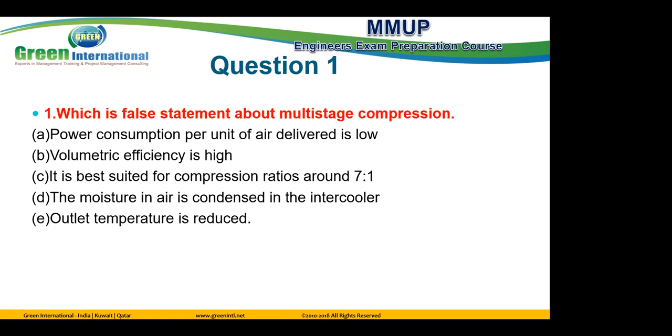All agree? B, I think efficiency will be higher in multi-stage compression. Yes, the false statement is about the stage volumetric efficiency being high.

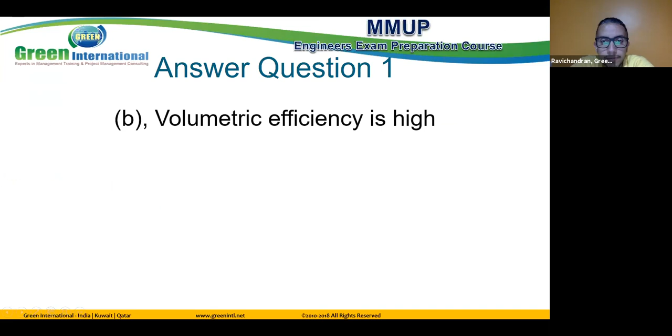In multi-stage compressor, isothermal compression is achieved by employing intercoolers. All agree? Yes. Multi-stage compressor isothermal compression is achieved by running the compressor at very slow speed.

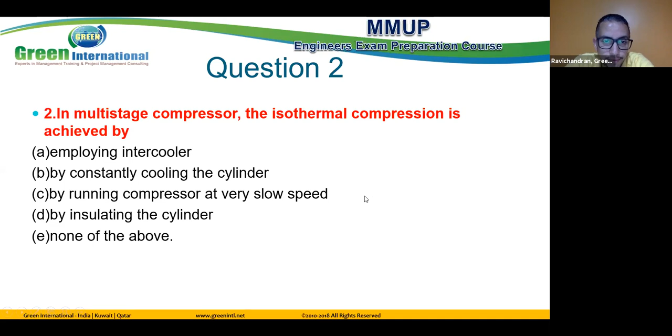Is it? Huh? Okay, why do we use multi-stage compressor?

You remember at the end of the session when I described the Brayton cycle, I told you about the constant pressure lines, that it is close together from the left side and going to be far from the right side, correct?

Remember? I think you don't remember. You remember?

What is that? This compression and this expansion by turbine. This constant pressure line with this constant pressure line. But in the left side, when going left on the TS diagram, we will see this line is close together, and when going right, we will see this line is far apart. Yes, remember this or no?

Yes, sir. According to that, this is the reason to use multi-stage compression, to not go up directly. We use multi-stage to decrease the compression work of the compressor used.

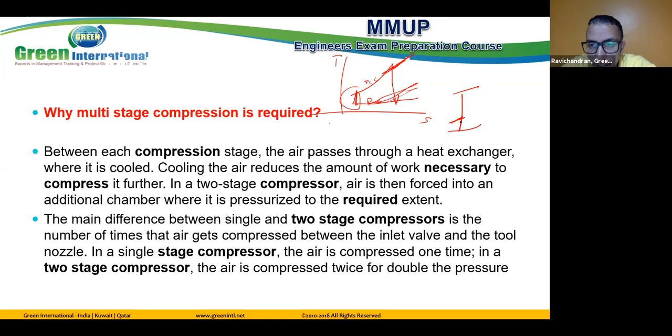So instead of going direct from this line to this line, I divide it like this. I go here, then cooling, then going again to compress, then cooling, then compress, then cooling, then compress, up to reach the final stage of the pressure required.

So instead of going direct from this point to this point, it's better to make it in stages like this. The total amount of work consumed for the multi-stage compression is less than the compressor going direct from 1 to 2 in one stage.

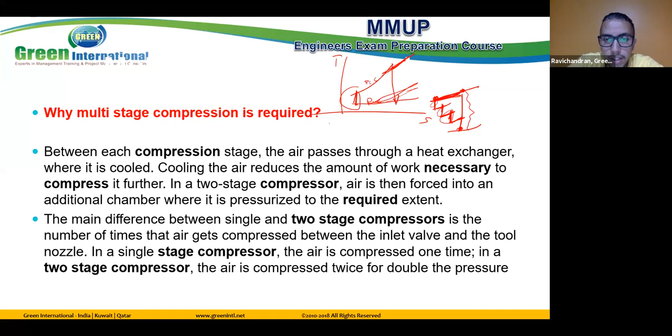See with me this diagram in detail here. If you go direct from point 1 to point 2, this is the final stage, this is the first or initial stage, and this is the last stage. If you go direct like this...

...it takes more power. But if you divide this into stages, you'll see at the end the total power consumed is less.

So if you go to the first stage and then to the intercooler, then second stage then intercooler, then third stage, you will see the total amount of compression work here is less than if you go by one stage.

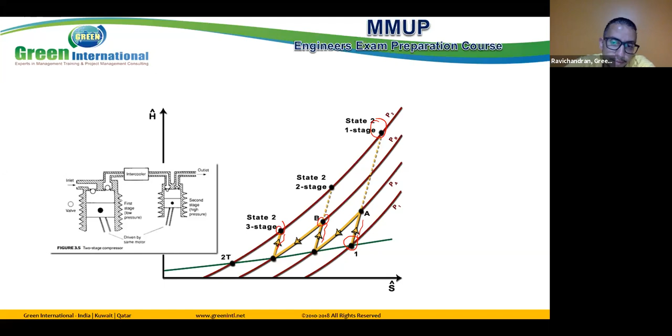It's clear? So you're going to save work. Clear this one? Yes, sir. Same here, to present how much work is saved here.

But sir, in the question you mentioned the second number question. What's the problem with the second question? Yeah, in that, multi-stage compressor is used for running at slow speed.

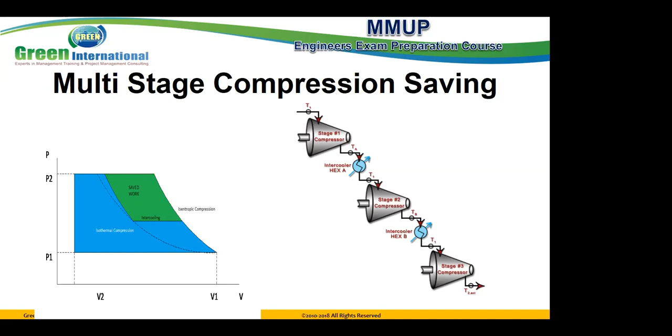Or yeah, this is for isothermal compression. Actually, what we do in practice is not this, because in practice we can't move or run at low speed. But theoretically, yes, this is the way.

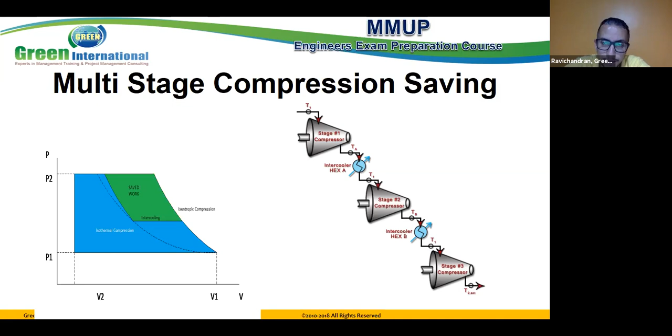But actually, in practice, we can't do that. We make other arrangements. We will see one question related to that. So the answer is that slow running is the answer, yes, right? Yes.

Adiabatic compression is one where no heat leaves or enters the compressor. Bravo, B. All agree?

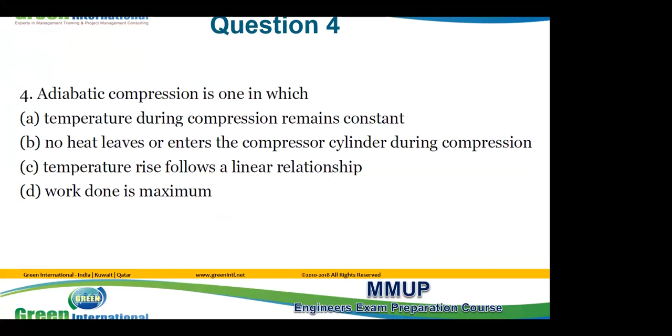All agree for that? Hello, engineer, all agree? Yes.

Capacity of a compressor is 5 meter cube per minute. Refers to free air. Yes.

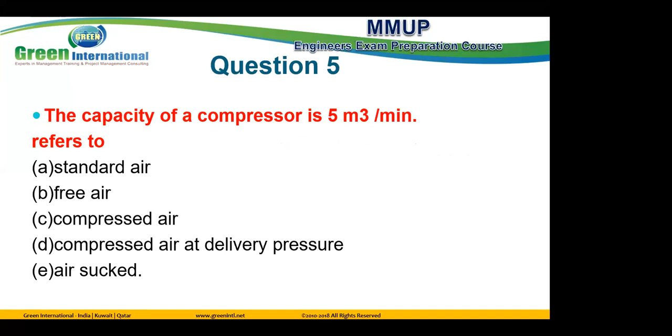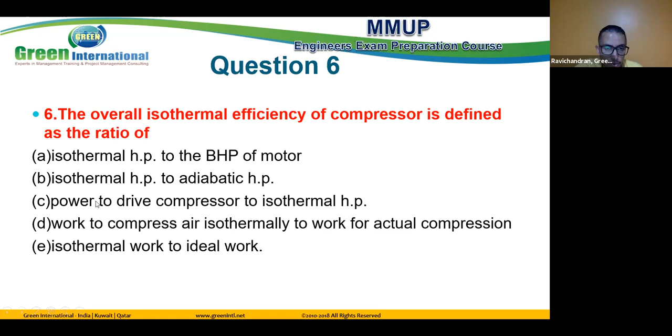Overall isothermal efficiency of a compressor is defined as the ratio of... Delta, let's see, A, C... C power to drive, no, I don't think so.

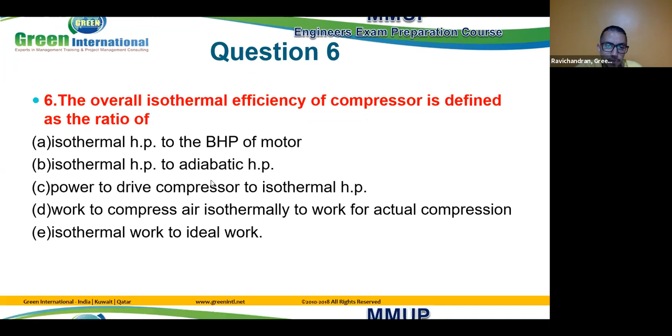Isothermal efficiency is isothermal horsepower to brake horsepower. Okay.

Here you can check with me. If you compress isothermally, this is the minimum work consumed for this process, which is PV equal to constant. It means the index number n equals 1.

I think we have one question before we solved it. N equal to 1, this gives minimum work consumed. Okay, so PV equal constant.

PV to the power gamma, which is the adiabatic process, gives the maximum work we can obtain, maximum, not minimum. PV to the power n, which is polytropic, is in between. Okay.

So when expanding, we get maximum work with PV raised to gamma, which is adiabatic. Adiabatic gives maximum work, and we get minimum work with isothermal, at gamma or n equal to 1.

PV equal constant is the isothermal process. This gives minimum work. Okay.

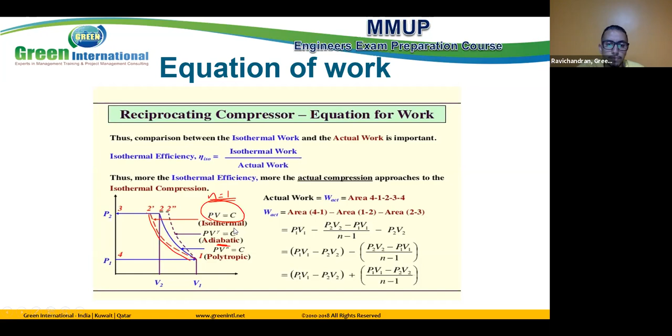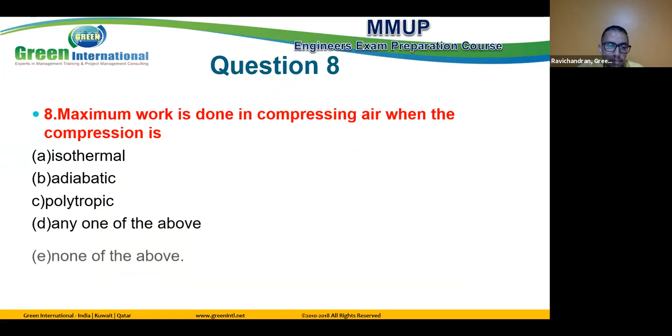Maximum work is done in compressing air when the compression is isothermal. A, isothermal. All agree?

All agree? No. Yes. Read the question again and give me the answer.

No, maximum work is done adiabatically. B, this is poly...

Adiabatic. Adiabatic. All agree? All yes, agree? Yes, correct.

Not isothermal. Please read carefully, okay?

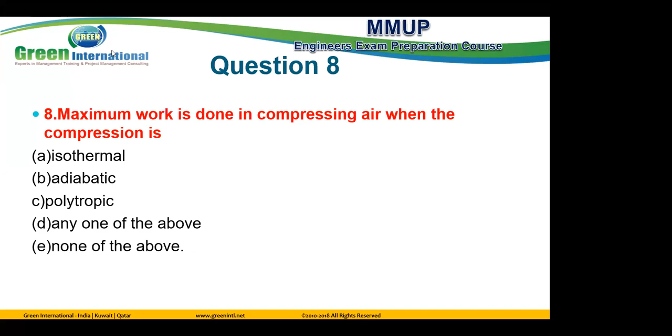For sure, if we talk about compressor, the isentropic is less than the actual. If we talk about turbine, the isentropic is more than the actual, correct? It depends on the function, because for compressor we need to consume work, so in ideal case this is less. For turbine we need to obtain work, so for ideal it is more, correct?

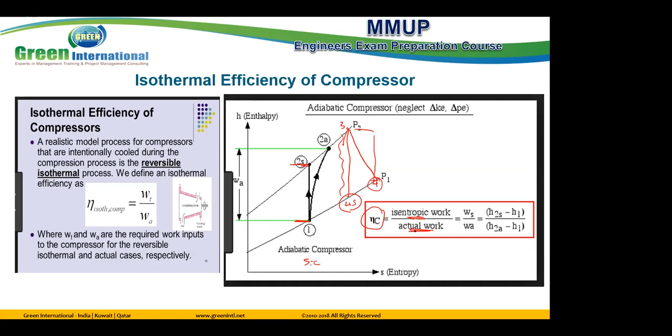By the way, the equation is the same. Isentropic efficiency, or isothermal efficiency, is equal to isentropic work divided by actual work. Isentropic divided by actual. Okay?

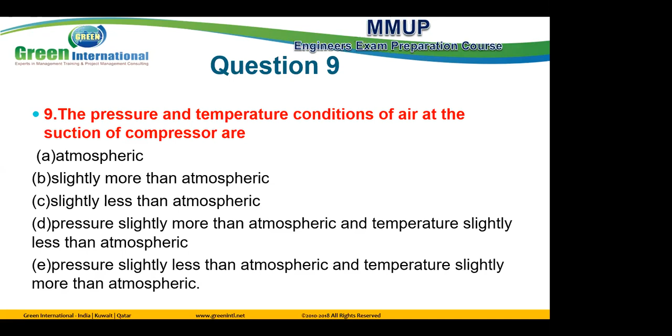The pressure and temperature condition of air at the suction of compressor are... E, E for England. Which one? E. Yes, E. Okay. Pressure is slightly less than atmospheric and temperature slightly more than atmospheric, correct.

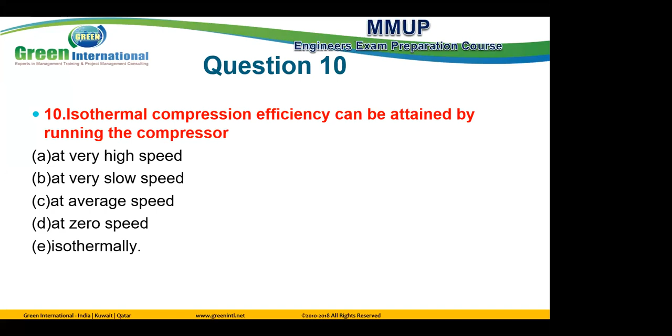Isothermal compression efficiency can be attained by running the compressor at very slow speed.

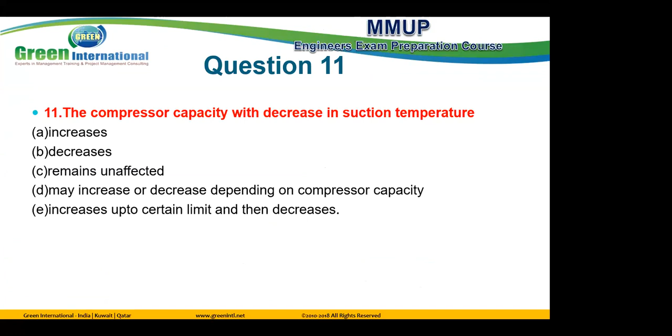Compressor capacity will, with decrease in suction temperature, what happens? Increases. Increase. A. Increases.

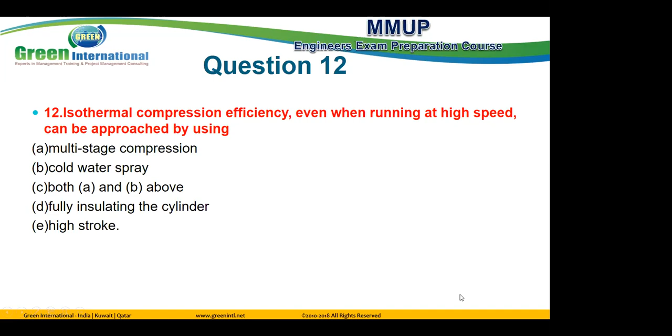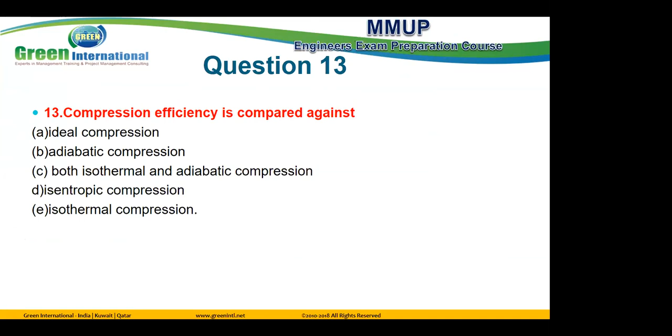Compression efficiency is compared against... E. Isothermal. E. Isothermal compression.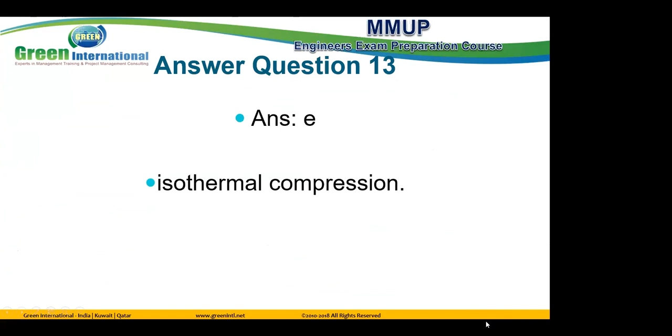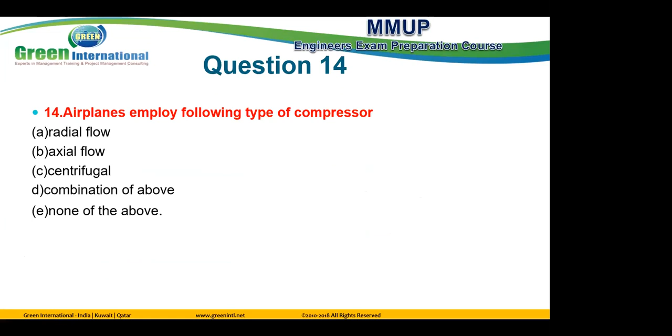Airplane employs which type of compressor? Axial flow. Radial flow. Axial flow. Finished? None of them. Actually, axial flow.

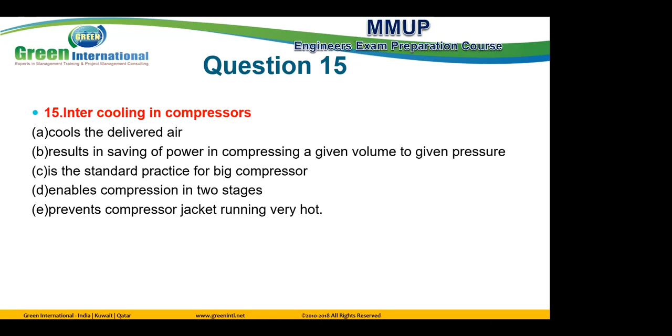Intercooling in compressor results in saving of power, sir. B. Compressed mechanism. B, results in saving of power. Saving power. Yes, sir. Sure. Yes, sir. Intercooling - the reason for intercooler is to result in saving of power in compressor.

This is easy and quick problem. Can you solve it, please? P1 V1 by T1. A. All get the same answer? Yeah.

So V1 over V2 equal T1 over T2. That's it. Can you write the formula? P1 V1 by T1, right? Yes, I write the formula.

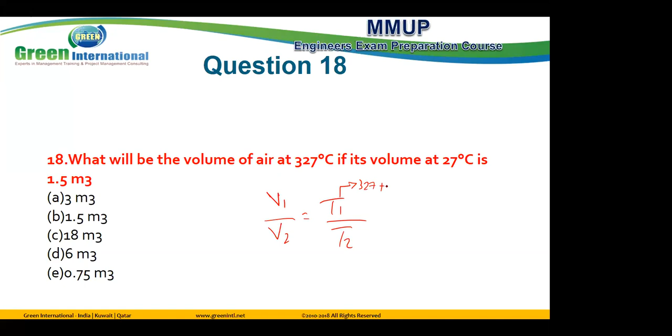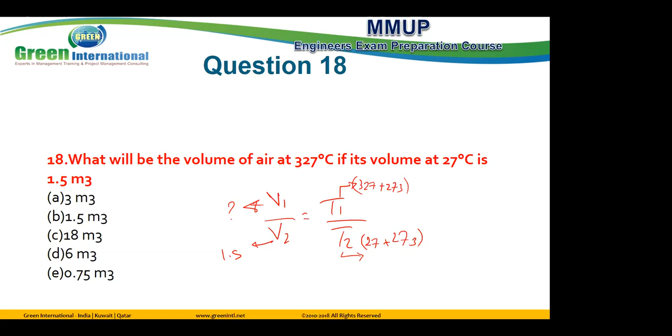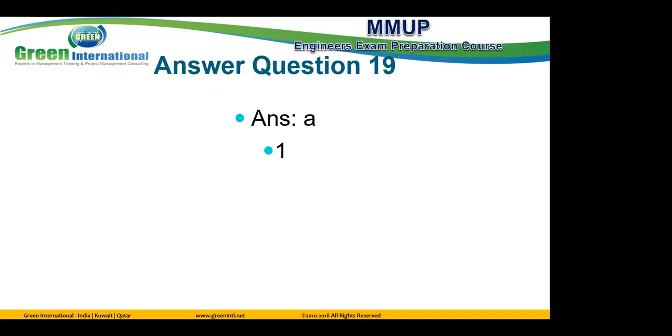One. One. Alpha. 1. Yes. All agree? No one here? Only one? Yes, when n equal to 1. Same curve we presented before.

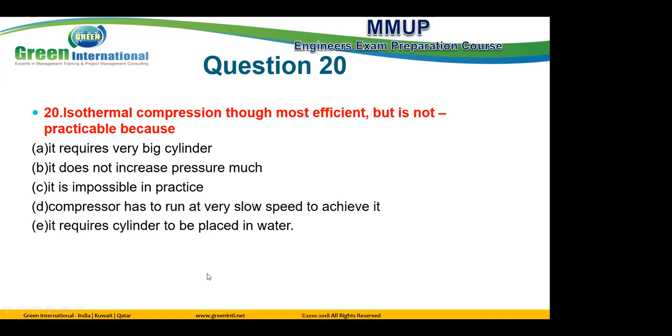Isothermal compression though most efficient. D for Delhi. Which one? D. Delta - compressor has to run it slow. So D, because if it runs at low speed, it will not compress running enough. At low speed, because it's about isothermal compression again. Yes.

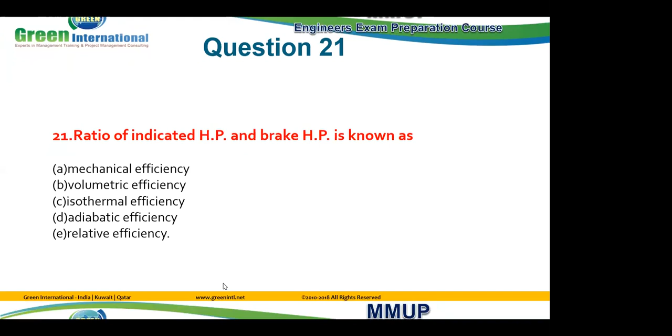Ratio of work done per cycle to the swept volume in case of compressor is called - compression ratio. Index.

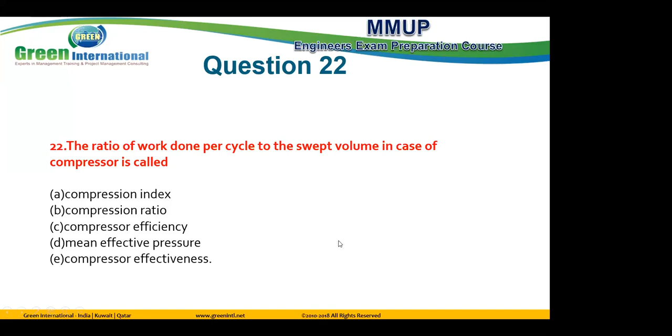Just guessing. E. Final. Mean effective pressure. Mean effective.

Here, just brief on what is the swept volume, what is effective swept volume, what is total volume. Actually, this here represents the total volume available. This one is the swept volume, for maximum volume for the cycle and the minimum volume for the cycle. This is swept volume. And actually, for the process itself, this is the effective swept volume.

Volumetric efficiency. What is the volumetric efficiency? Effective swept volume by swept volume. That's it, this is volumetric efficiency. Effective swept volume to swept volume.

And what is clearance ratio? Clearance ratio, it is clearance volume by swept volume. Clearance volume by swept volume.

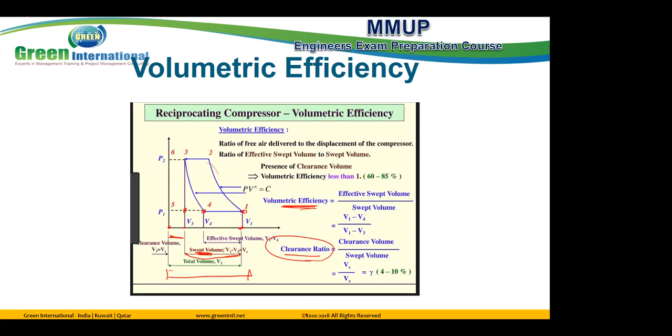Cylinder clearance in a compressor should be... D. B. As small as possible. As small as possible. Great.

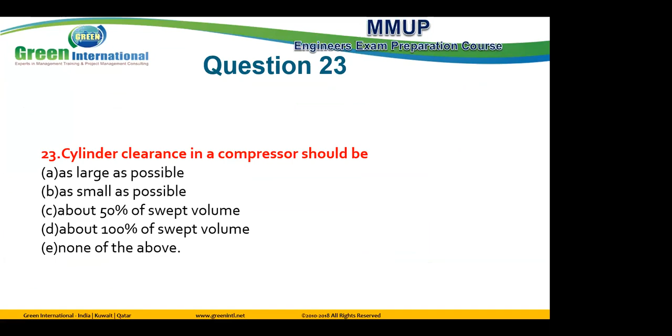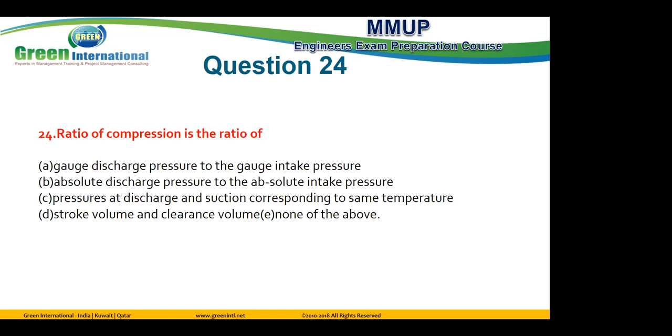Okay. Here also represents again this volume of combustion chamber when the piston reaches top dead center. And this is mentioned for swept volume. This is the area below. Yeah.

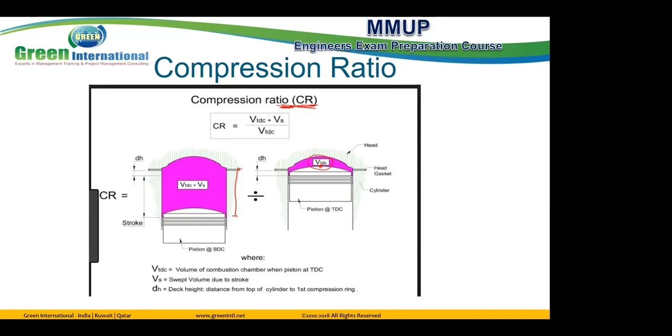Clearance volume in a reciprocating compressor is essential - E, E for England. Which one? E. E? E. Yeah, great, correct.

This is not important.

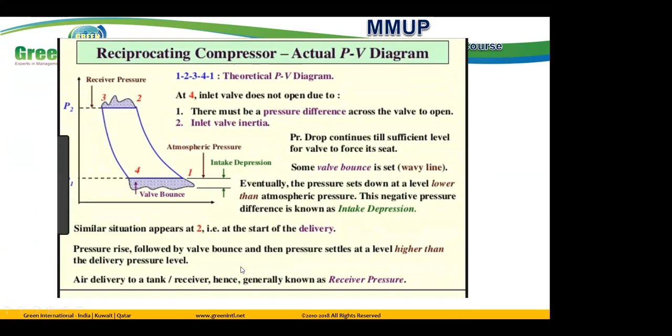Which of the following plants is the smallest and lightest for generating a given amount of power? Gas turbine plant, E. Any other idea? E, gas turbine. Yes, E is correct. Not solar - gas turbine is still the smallest one.

A simple turbojet engine is basically B, gas turbine plant equipped with a propulsive nozzle and fuel. This is what we will see next in the slide here.

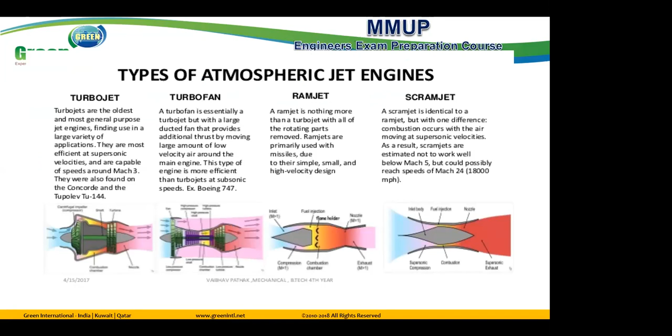Here are some types of jet engines: turbojet, turbofan, ramjet, scramjet. We will describe a small brief for each one.

First, I will describe jet engine design. Jet engine design consists of a normal engine, same like gas turbine: compressor, combustion chamber, and turbine. But here in the jet engine, we add at the beginning a diffuser before going to the compressor, and at the end we put the nozzle before we face the jet directed to atmosphere. After the turbine it continues to expansion by the nozzle. So the process is the same process as gas turbine, but we extend it with the diffuser part and the nozzle part.

So the process, instead of starting from 2 to 3 only, now starts from 1. 1 to 2 is the diffuser, isentropic compression in the diffuser, and it continues the same isentropic compression in the compressor. 3 to 4, heat is added in the combustion chamber at constant pressure. Then going to expansion, the same expansion up to 5 which is the turbine, isentropic expansion. But here we continue expansion and we get it at 6, isentropic expansion in the nozzle.

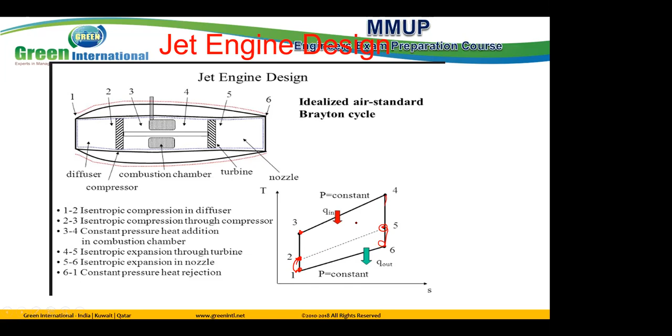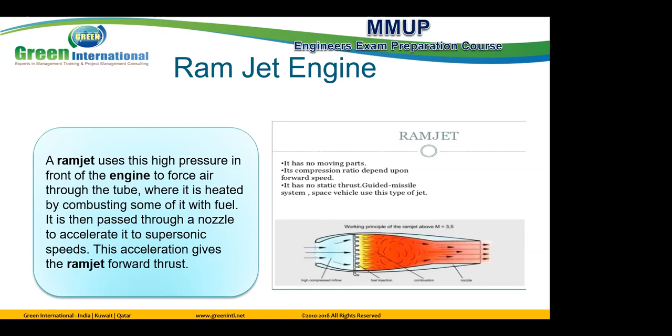Scramjet is short for supersonic combustion ramjet. So scramjet works at a higher speed than ramjet. Ramjet works in the supersonic range, but scramjet works with supersonic combustion, meaning higher speeds than ramjet - almost hypersonic speed, not normal supersonic. This hypersonic speed starts from almost 4-5 Mach number and goes up. It is designed using hydrogen as fuel and oxygen from the atmosphere.

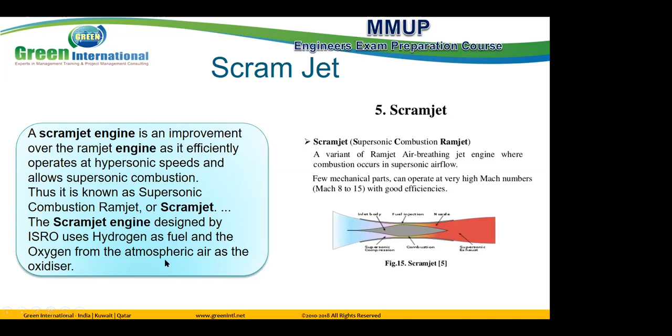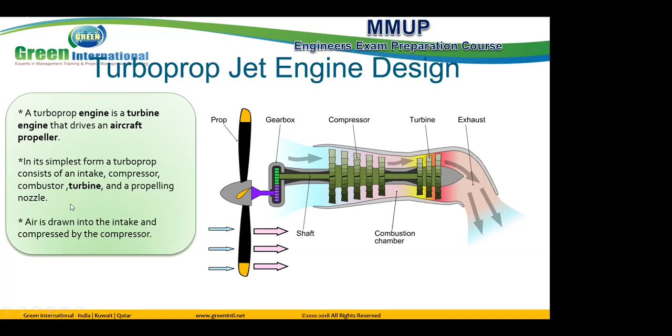Turboprop jet engines join the shaft of the compressor at the end by a gearbox and propeller. It just consists of intake, compressor, combustor, turbine, and propelling nozzle. That's it. Last one is turbo shaft.

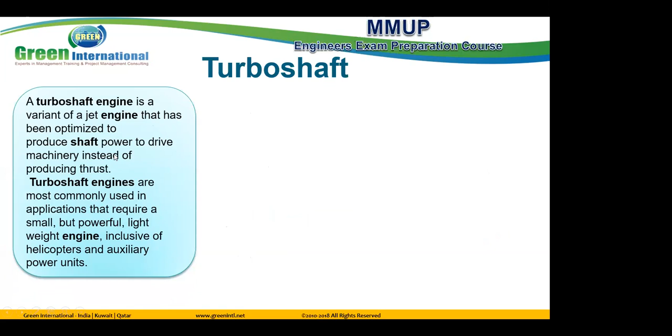Turbo shaft is a variant of jet engine that has been optimized to produce shaft power to drive machinery instead of producing thrust. This is the shape for this one, like this. Normally we use this one for helicopters.

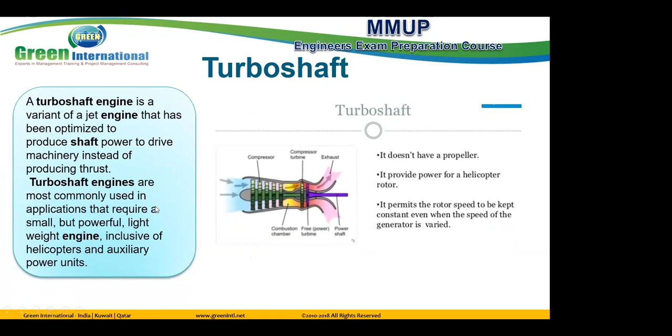Okay, some questions related to this part. Some of these questions are difficult, but just be aware of the type of question. For speed above 3,000 km per hour, it is more advantageous to use ramjet engines - B, ramjet engine, correct. Excellent. As mentioned, ramjet is within the range of 2 Mach number to 5 Mach number, and above more than 5 Mach number it will be scramjet.

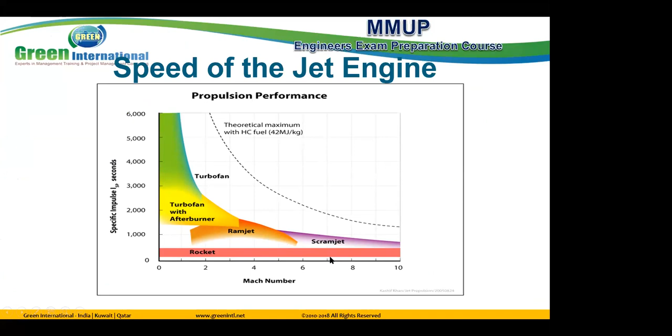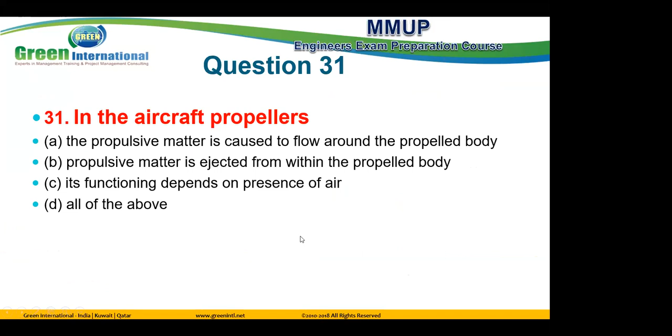Aircraft propeller. No idea also? All of the above, yes.

Work ratio of a gas turbine may be improved by: A and C. A - increasing turbine work and decreasing compression work. E for elephant - one more option. Yeah, A and C is correct: decrease the compression work and increase the turbine work.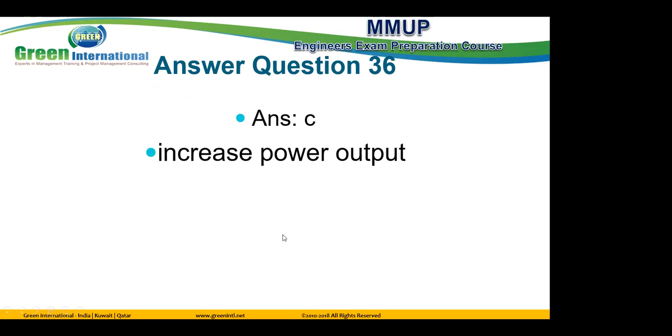Reheating in a multi-stage expansion gas turbine. Sir, reheating is what process? I forgot actually. Reheat means we divide the turbine into stages, and after expansion in the first stage of the turbine, we take this amount of output and reheat it with the output of the combustion chamber to heat up the temperature.

Then it goes to the second stage of the turbine, so you obtain more work output from the turbine because you increase the temperature again, correct? So in the same turbine, it goes to the second stage with increased temperature.

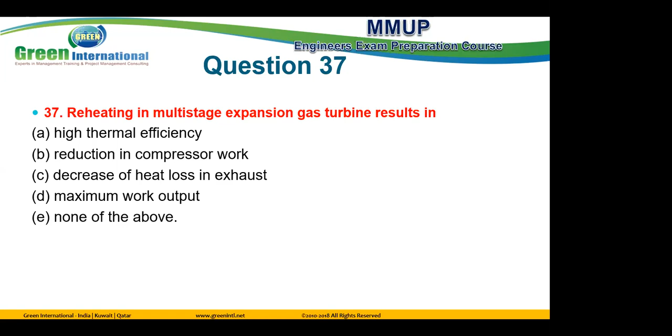Yes, in the same turbine, not a different turbine. The second stage of the turbine, not the first stage. First stage, second stage - it's multi-stage. Maximum work output - yes.

Compression ratio in a gas turbine is of the order 8 to 1, or 12 to 1... it's 8 to 1.

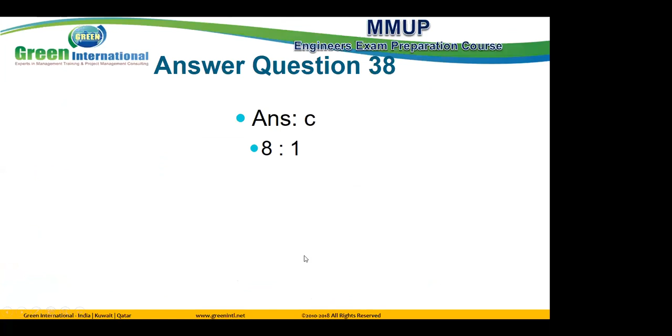Gas turbine cycle with regenerator. The regenerator is slightly different from reheating. With a regenerator, you take the exhaust from the last stage of the turbine. The output of the last stage is the exhaust, correct?

Normally this exhaust is still at high temperature. So instead of losing this energy, you take this branch and connect it to a heat exchanger, making heat transfer between the exhaust and the output of the compressor. The output of the compressor is air, correct? Still, the temperature of the air is low, and it's going to the combustion chamber to mix with fuel and burn to obtain energy, correct?

Yes. So before the air goes to the combustion chamber, we heat exchange this line of air with the exhaust of the turbine before losing this exhaust. So what happens? I increase the temperature going to the combustion chamber. So you increase the total efficiency for the combustion chamber.

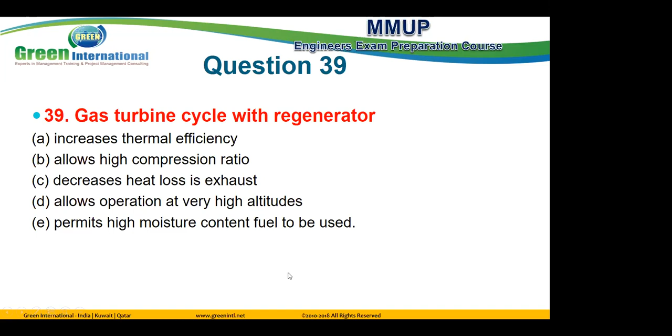Yes, same like this. The output here is around 250 to 300. Going back again - just heat exchange, not mixing, between the exhaust line and the line coming from the compressor to the combustion chamber. Clear? Okay, yes sir.

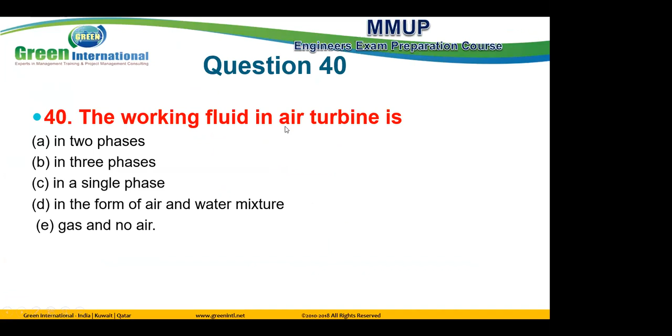The working fluid in a gas turbine is... No, the working fluid in air turbine is mentioned here as air. So it is air, one single phase.

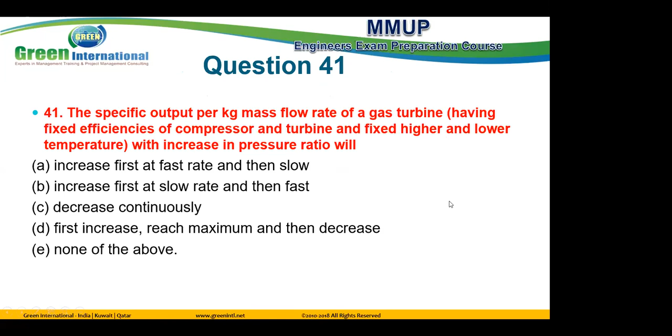Specific output per kilogram mass flow rate of a gas turbine, with fixed efficiencies of compressor and turbine, and fixed higher and lower temperature, with increased pressure ratio - remember the curve: first it increases, reaches a maximum, and then decreases. This curve you studied before, correct? Back to the slide for this.